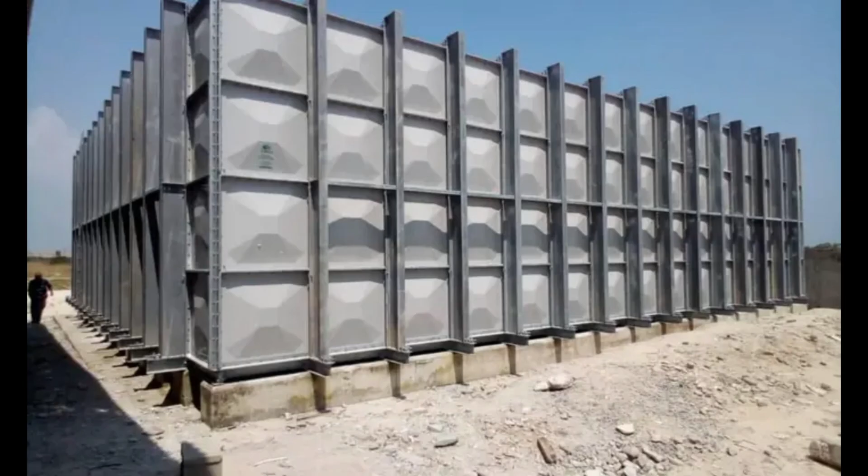Hello, hello, hello. We are designing a computer-controlled composite pressure vessel filament winding machine. And in this episode, we'll continue from where we stopped in the last video. The last video was an introduction of the entire scope of the project. But in this video, we are doing the proper design. Right now, we're talking about the kinematics. So, kinematic design.

If you have not seen the first video, it's instructive to go back and take a look at it, study, and take notes, because everything we did there applies here. In order to discuss the kinematics, I have to draw the frame, all right? So that's what I'm doing now.

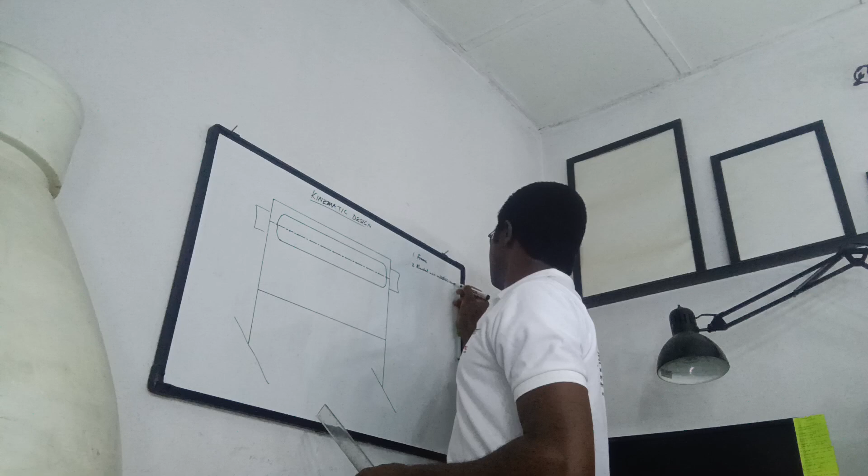Number two, a class of components that we're calling the mandrel axis rotation components. And as the name implies, they help hold and rotate the mandrel according to the computer program that we have written. So that's the first axis. The next axis we need to consider is the carriage, which is extremely important.

The carriage runs all along the length of the machine. It's longer than the machine actually because it needs to be able to move the payout eye device. And by the way, the payout eye device is like the end effector of a robot. A computer-controlled filament winding machine is actually a robot.

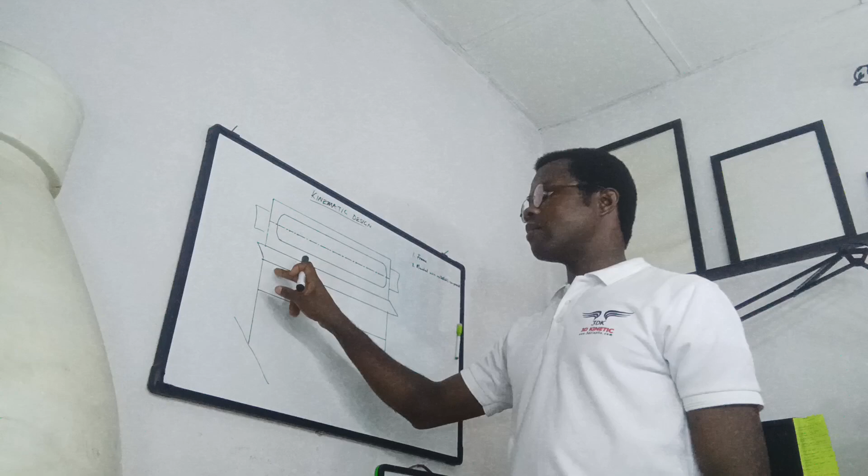So in this case, we're working with three axes, although we said that we might make a decision to add a fourth axis. So this is essentially a three or four axis robot. Okay, so this is robotics, in case you were wondering. So the carriage for the payout eye device carries not only the payout eye device, but also all the other components and even other axes that are required to move the payout eye device. So this is the carriage axis.

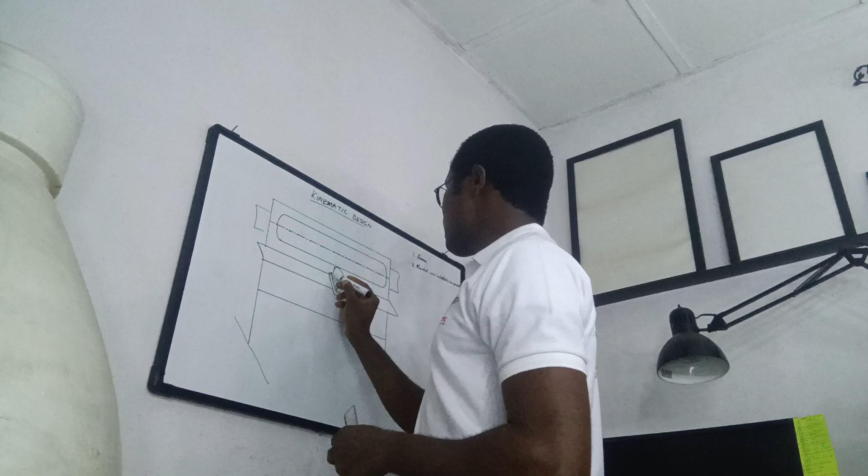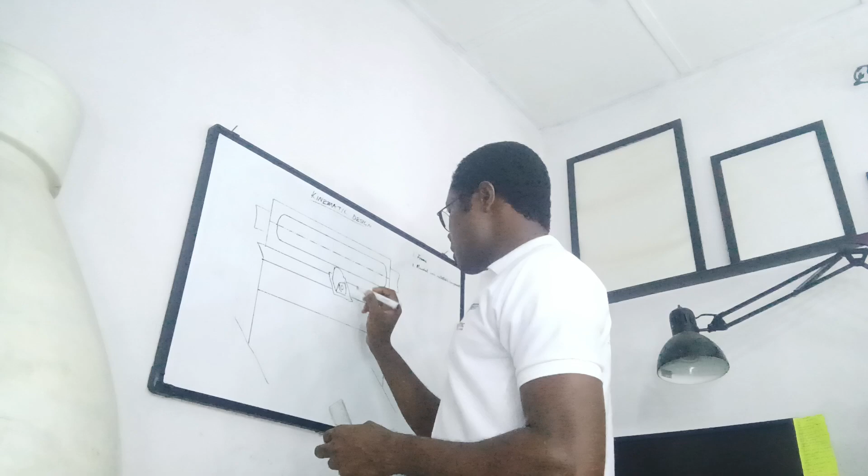On this carriage axis is mounted the payout eye device. The payout eye device winds wetted filament over the mandrel. It sits on a platform like that. And then the payout eye has a roll axis or tilt axis. This axis allows the payout eye device, which is a horizontally positioned roller at its tip, to tilt like this, okay, or roll. So this is the payout eye roll axis, right?

Payout eye roll axis. So since we're classifying components based on the axis, we'll call this the payout eye roll axis components, just like we did before for the other one. So the payout eye device has the ability to roll, and it has a range of motion of 90 degrees only. So this is a 90-degree range of motion.

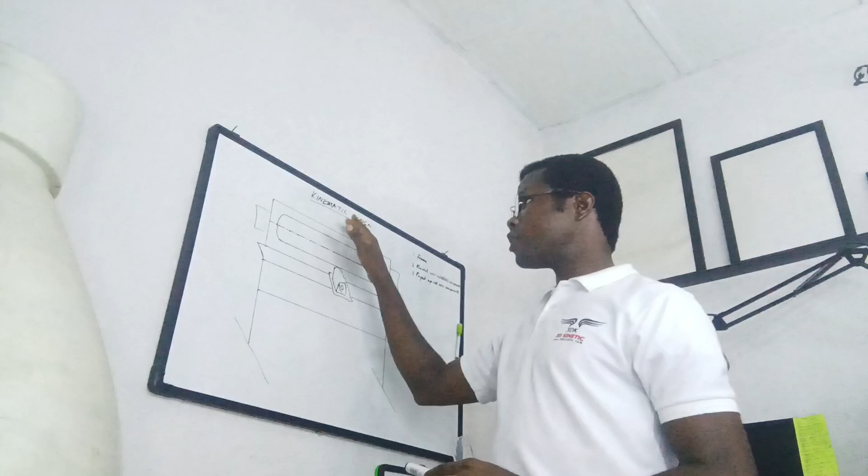And of course, we need to talk about the angles and distances because we're talking about the kinematic design, which is basically discussing how the machine will move, okay? The range of motion for the various axes. So for the mandrel rotation axis, this rotates 360 degrees many times, ongoing. So we'll program it to rotate as many times as are needed for the payout eye device to fully wind the entire surface of the mandrel, which we'll call one layer.

So when you finish winding the filament over the entire surface of the mandrel without any gaps, you have one layer, okay? And there are many different types of layers. So there are going to be the helical layers, there are going to be the hoop layers, and so on and so forth. But we'll talk about that in detail when we begin to discuss the actual programming and the winding pattern. There are many winding patterns depending on the application, but we'll talk about them and the factors that govern those winding patterns. So this is the payout eye roll axis.

Then we are considering adding another axis here, which is the payout eye yaw axis. So if you're familiar with aerodynamics, you may be familiar with the term yaw, I'm sure, or you may have come across it in some other discipline. So basically, while the payout eye roll axis involves the payout eye device moving like this, 90 degrees, okay? The payout eye yaw axis moves it in this way. So it rotates it around a vertical axis, okay? So the payout eye yaw axis is equivalent to moving like this. The payout eye roll axis is equivalent to moving like this. So I'm sure that's clear.

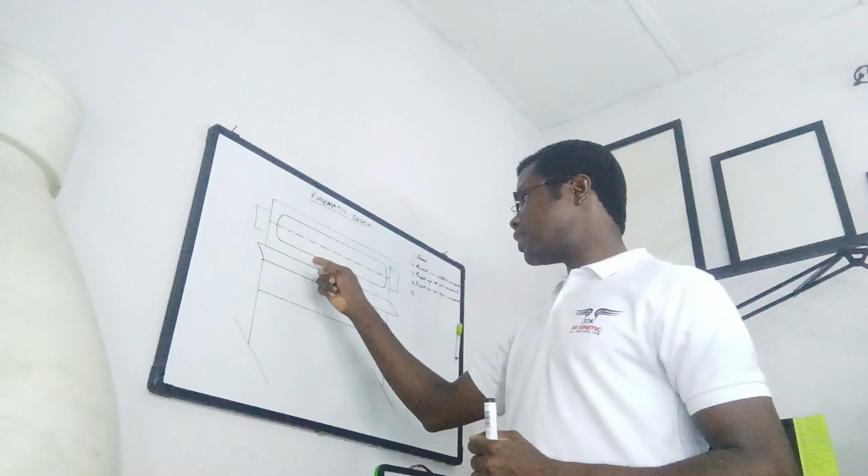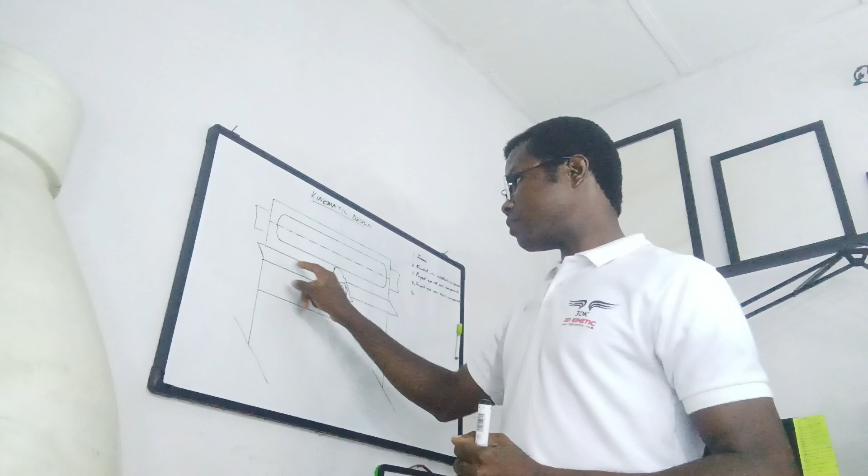And why do we even have these additional axes? We have these axes because of the complexity of the pressure vessel, particularly around the bottom and the top caps, which are shaped as domes. Okay. For the cylindrical segment of the mandrel, a simple motion along the carriage axis would be sufficient for the payout eye to simply wind a filament. If you're doing simple hoop winds, or when you're doing helical winds at a particular angle, you will run into difficulties if you only have that degree of freedom riding on this axis and then the mandrel rotating.

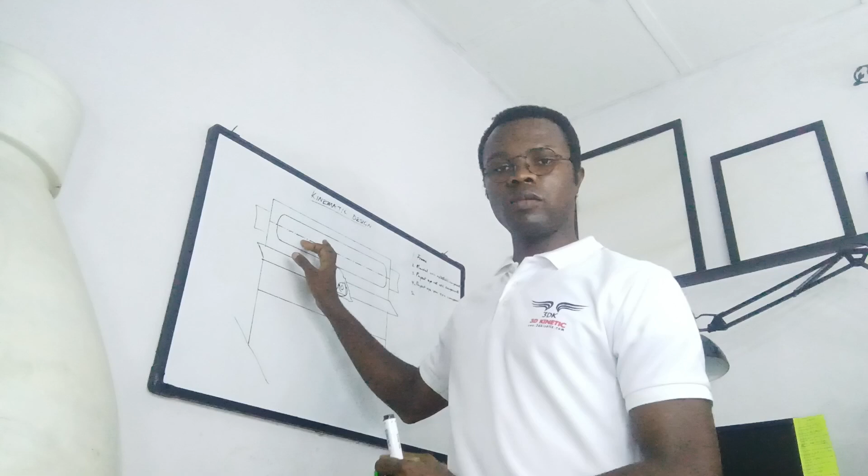You need the payout eye device to be able to position and face the mandrel more directly. You want the payout eye device to dispense filaments at 90 degrees. You want the filaments to be coming out at 90 degrees. You don't want it coming out at awkward angles, which will cause it to have inconsistent patterns. It will not lie in the same way. You may have variation of the width and so on and so forth. So these are the reasons why we have multiple axes.

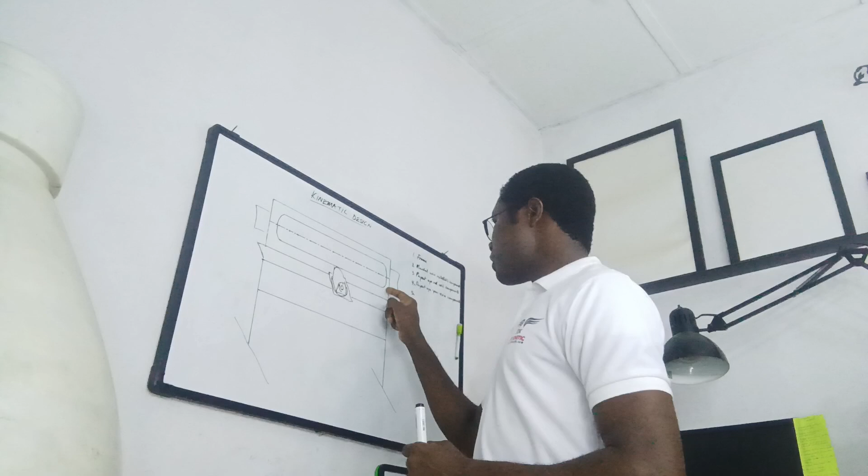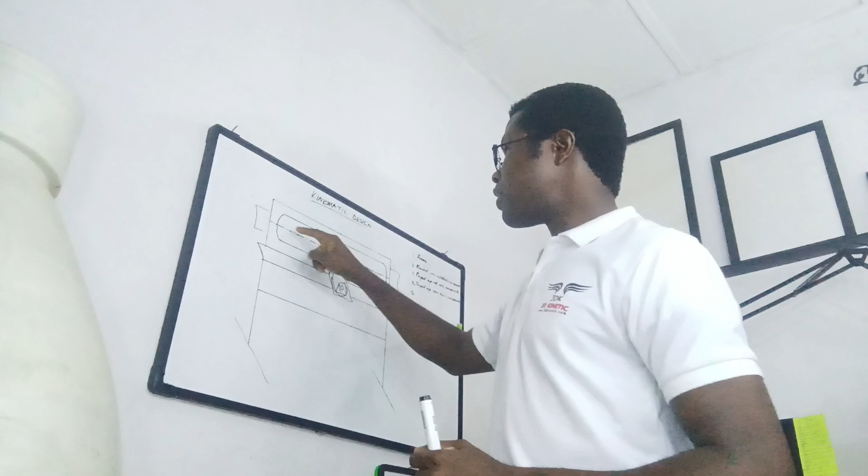It's also very important because when you're winding the material, when you're feeding the material, it allows you to more carefully and more consistently position the filament, because sometimes when you're winding around the ends, around the domes, complicated shapes like that, if you don't have a program that accommodates the shape properly, you can have fibers slipping away from the initial position later. So for example, you can have this move over there, and then the fibers can lay down in the correct position. But as the machine moves back to continue the cycle, that fiber can leave that position.

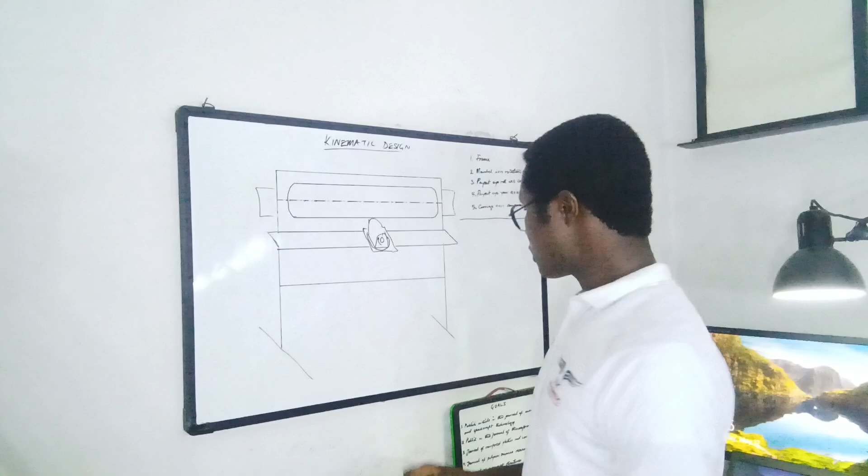And when you have a gap there, a gap is a weakness in the component. So when you perform one complete layer, the expectation is that every square millimeter of the surface of that mandrel has been covered with the filament. Any gaps are weaknesses. So if the cylinder were to be inflated or put under pressure, that would be a likely failure point. We will now go ahead and discuss the carriage axis components in greater detail. So

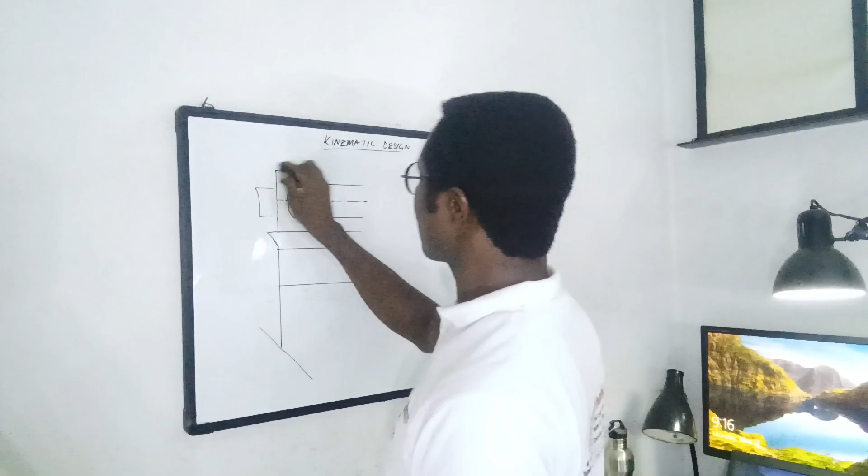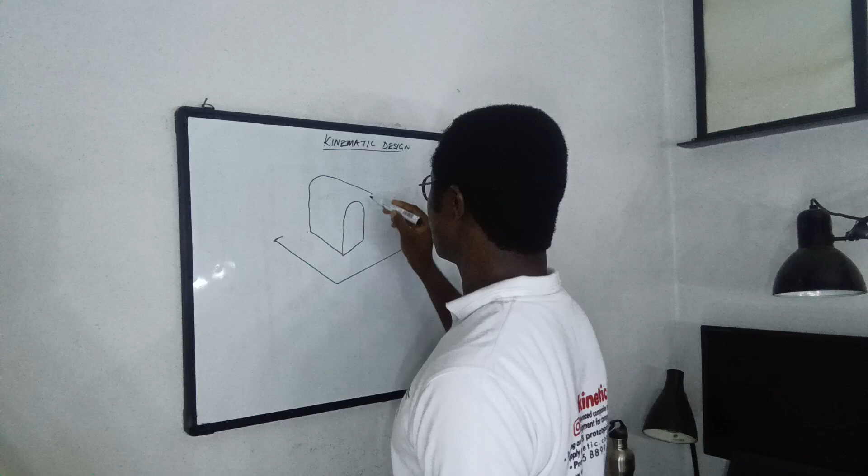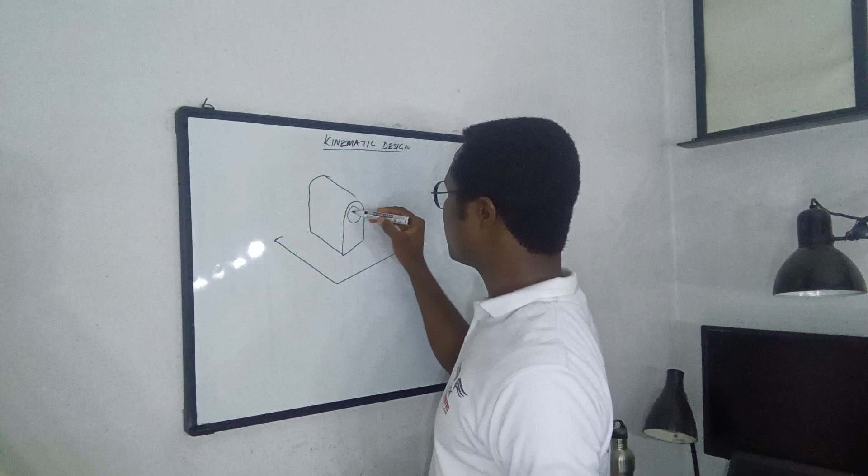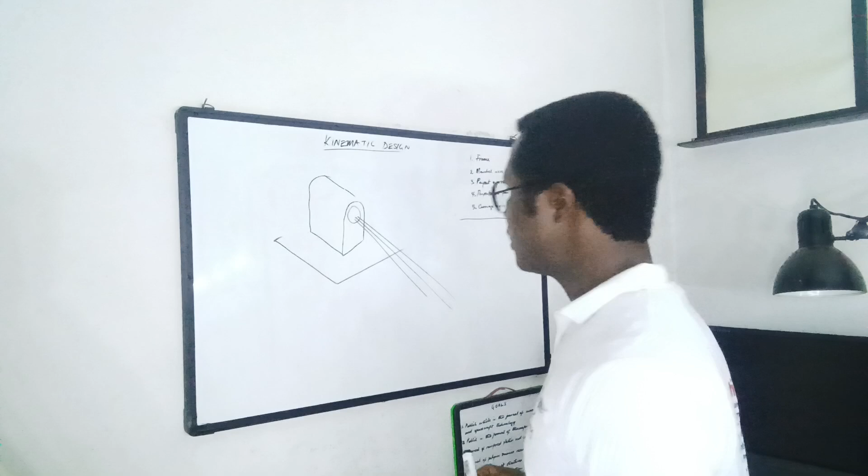As initially sketched before, there's a platform that the carriage axis sits on. The carriage axis supports the payout eye device. The payout eye device has a tube through which the fibers are fed. So let these lines represent the filament being fed into the payout eye roller.

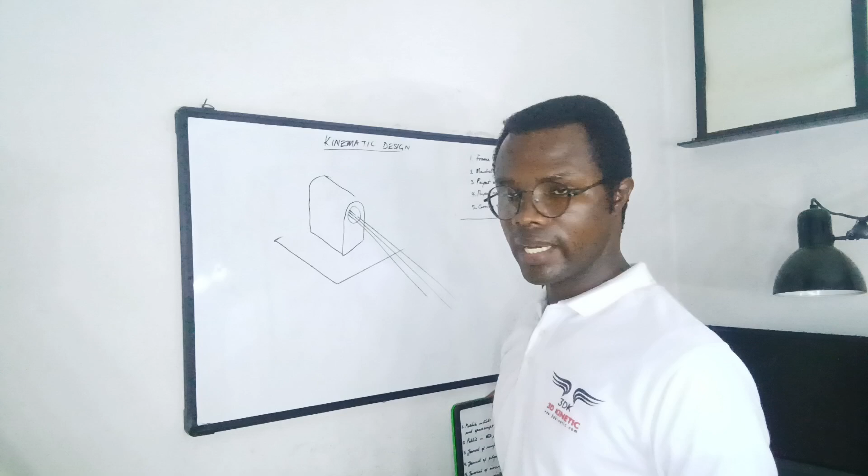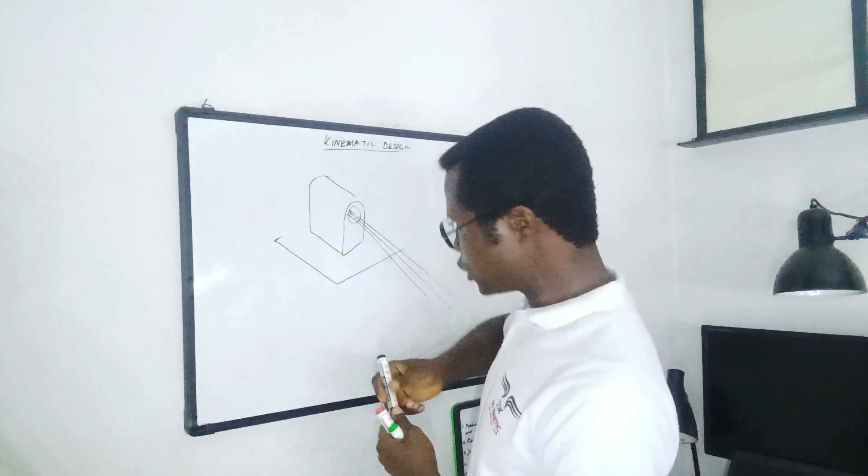These filaments are going to be on bobbins that are mounted on a frame. So they're fed from bobbins mounted on a frame. They're passed through a tensioner. They go through rollers and are immersed in activated epoxy resin or polyester resin, depending on what the winding is being done with. And then they move into the payout eye device, going through this opening to a roller, which is called the payout eye.

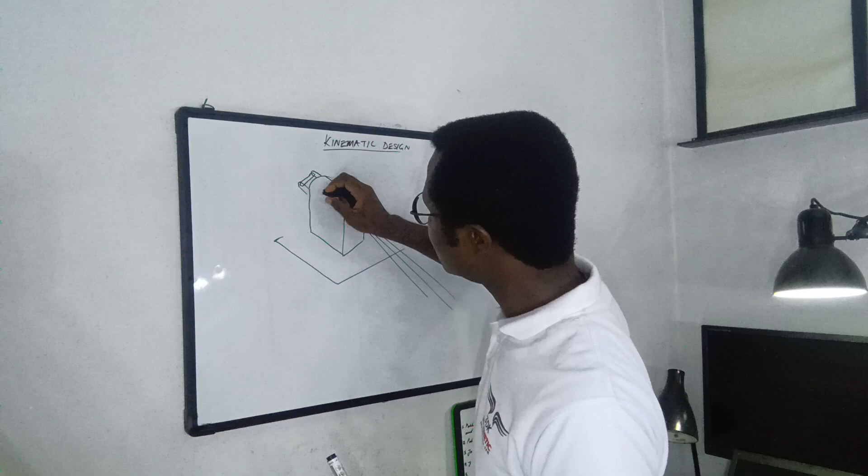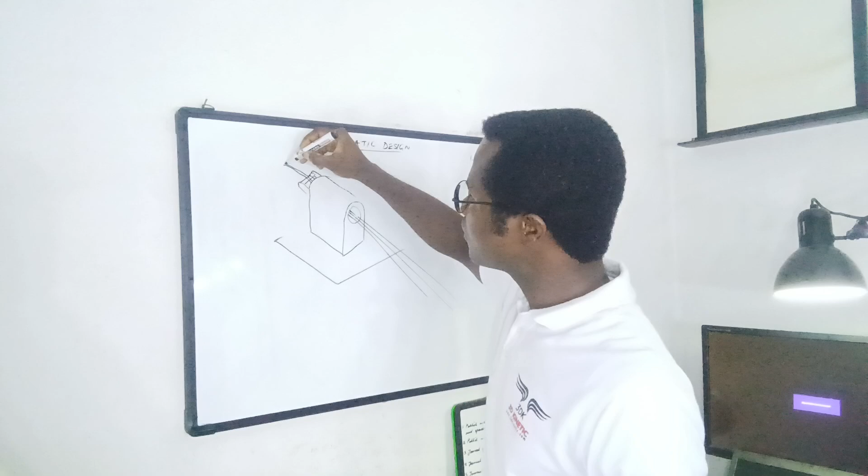This is what the payout eye roller looks like. And I'll discuss the roller more specifically. It has a special profile that allows it to perform the task it's designed to perform. Okay, that's what it looks like. The fibers wind over the roller and they are fed to the mandrel. They wind around the mandrel.

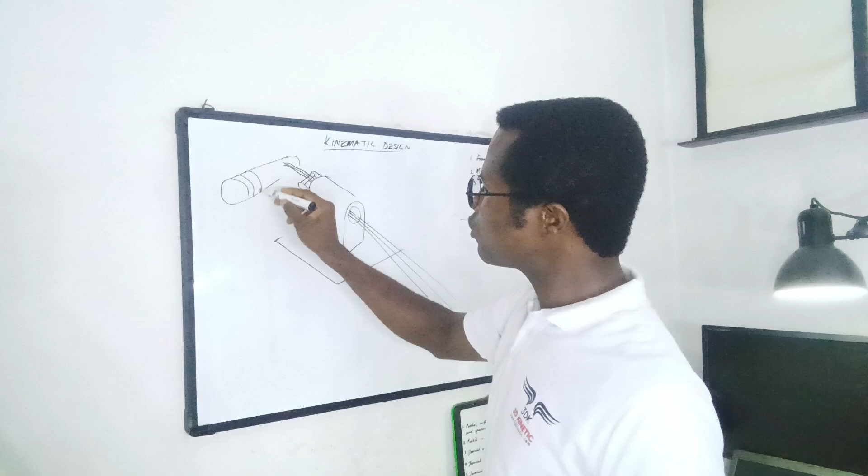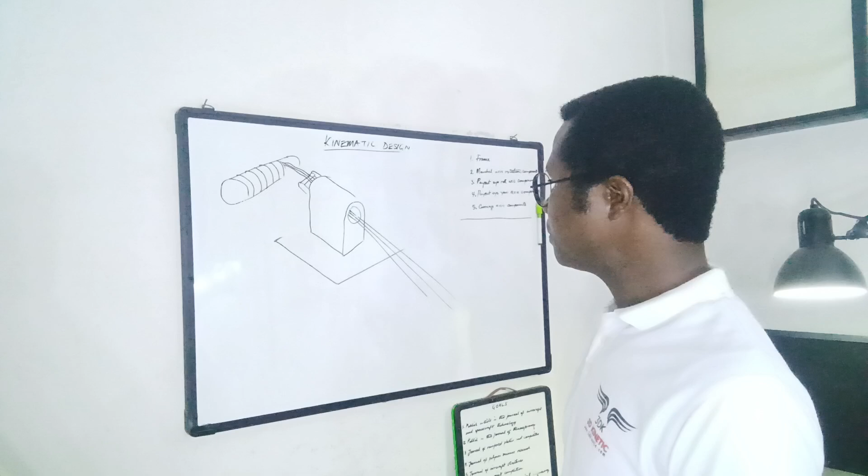So let's draw a small cylinder here to represent the mandrel. And let's draw lines on the mandrel to represent fibers being wound over the mandrel, and so on. So this is a simplified look of what the carriage axis looks like. So the carriage axis supports all of these.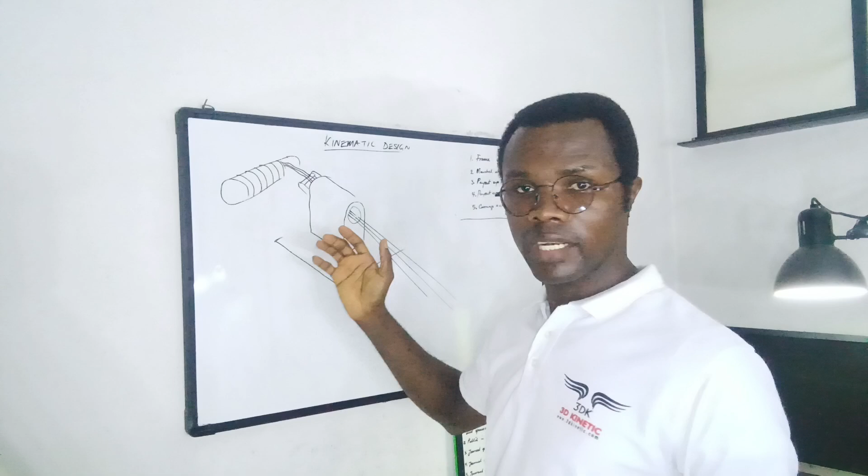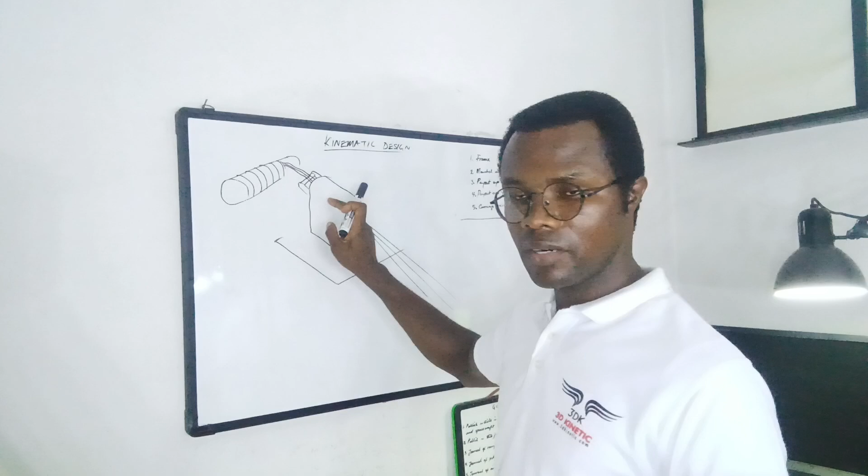This cylinder within here is mounted on bearings on both ends, and there is a half gear, okay? Because it has a degree of motion of 90 degrees, although the half gear allows you to have 180 degrees motion. So we have an allowance to be able to change our minds during the programming part. But at a minimum, we have at least 90 degrees here. But in actual fact, we have up to 180 degrees.

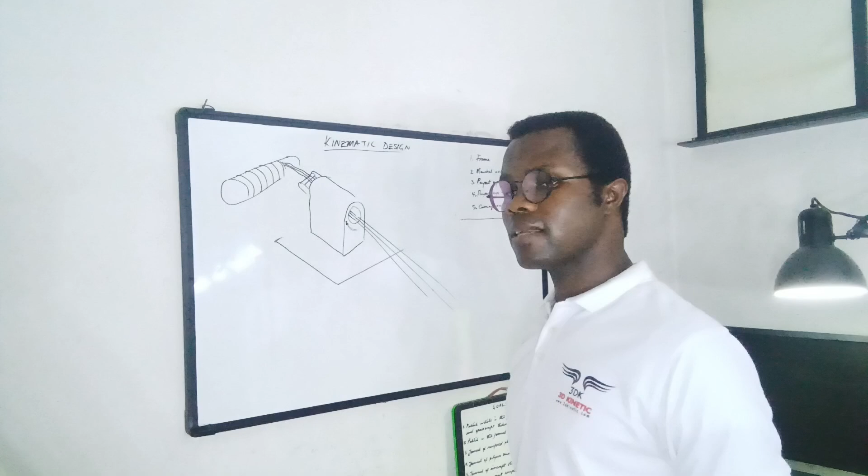So this cylinder you see here has the ability to roll. So this is the mandrel payout. This is the payout eye roll axis. It gives it that degree of freedom to move 90 degrees. And as I said, that's done with a half spur gear, half of a spur gear. Now, what I mean by half of a spur gear is, you know what a gear is, right? It's got teeth all around it.

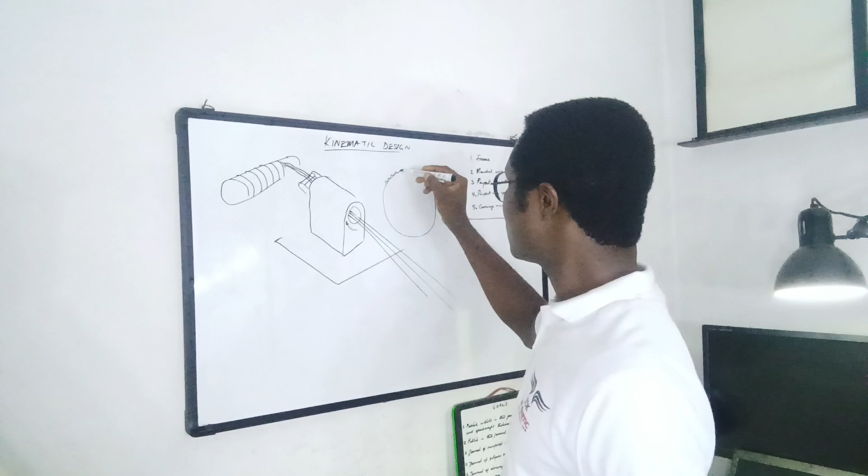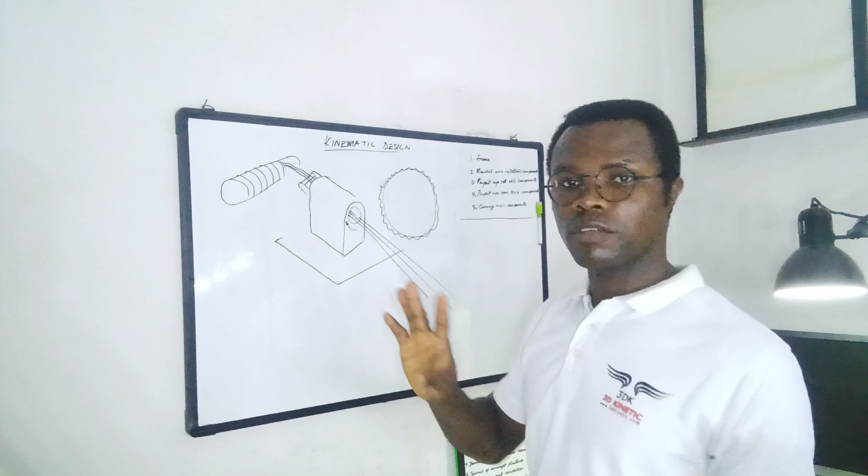But in this case, in our application, we're not going to rotate the device 360 degrees, which is a complete rotation. It's occasionally going to move 45 degrees in one direction, 45 degrees in the other direction. So actually, we don't need the other half of the gear. Okay, we don't need this other half of the gear. This is the center.

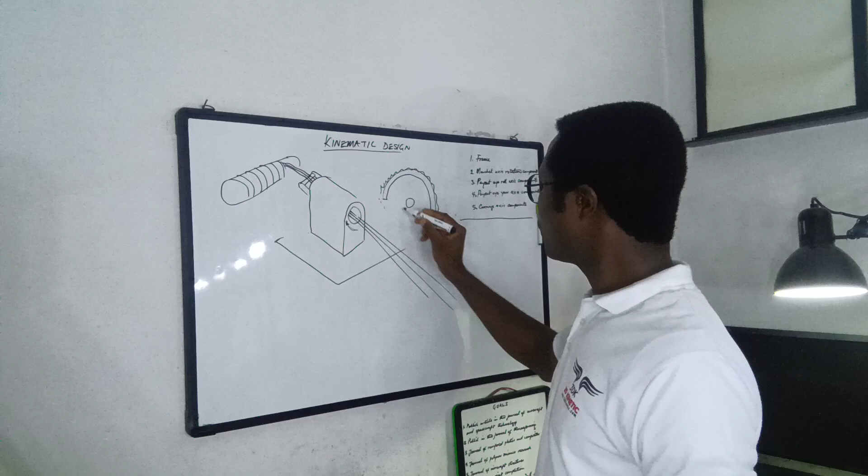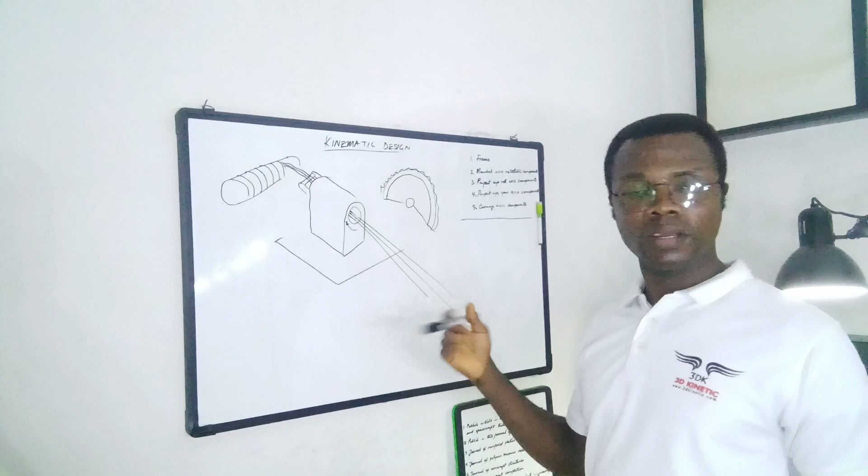So we just need a part of that gear to minimize material use. The rest of the gear will never actually be used. So there's no point using the full gear.

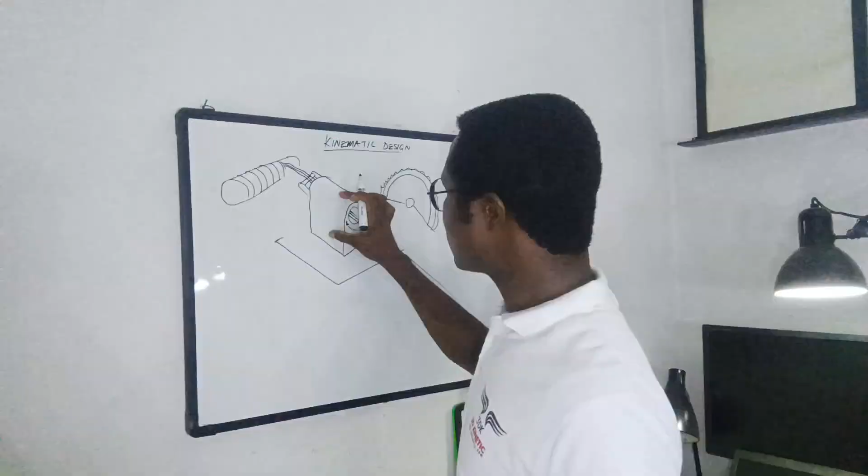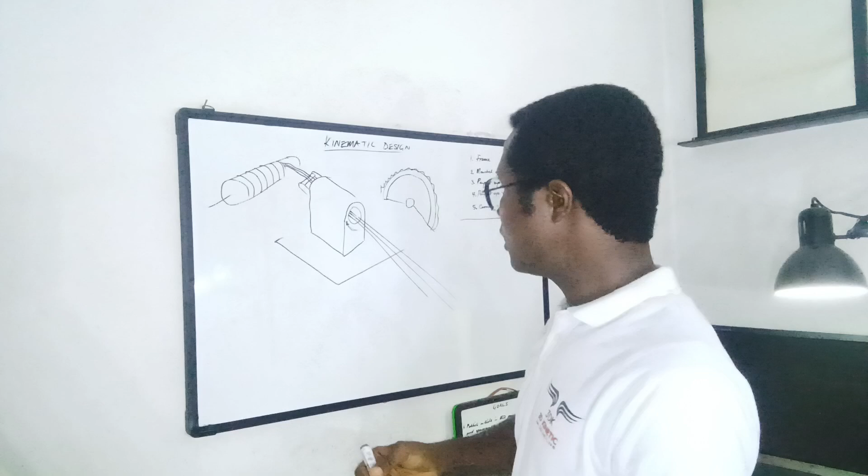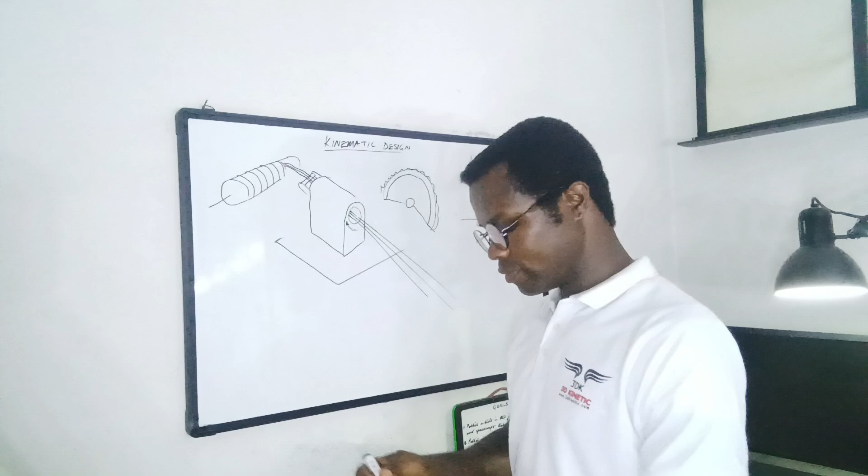Okay, then the payout eye device, as I described, has a cylinder through which the wetted fibers are fed over rollers onto the mandrel. But in order to implement the yaw axis that we just described, the payout eye yaw axis, which allows the payout eye device to move in this way: the roll axis moves the roller in that way, and the yaw axis moves it in this way.

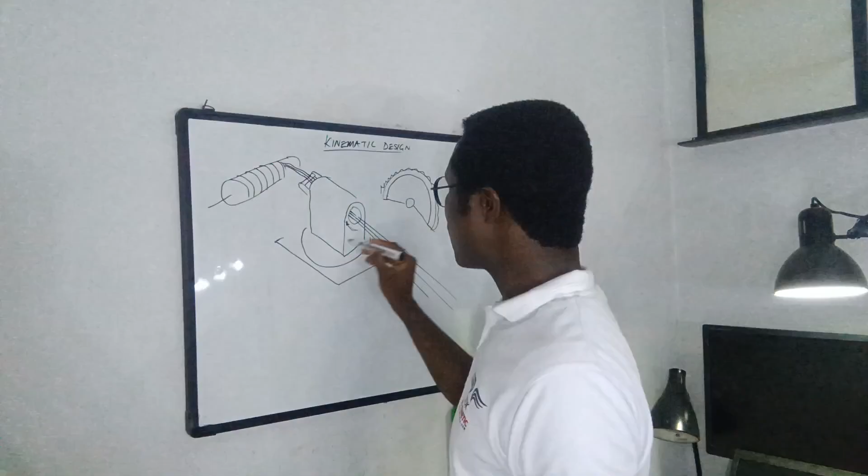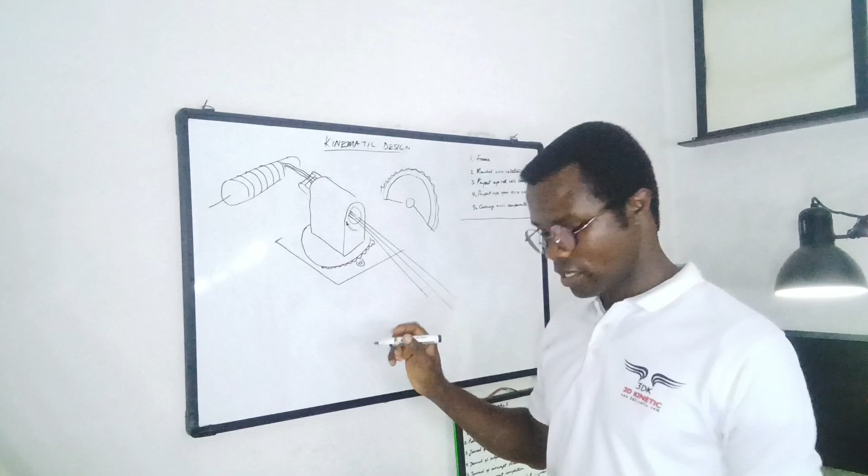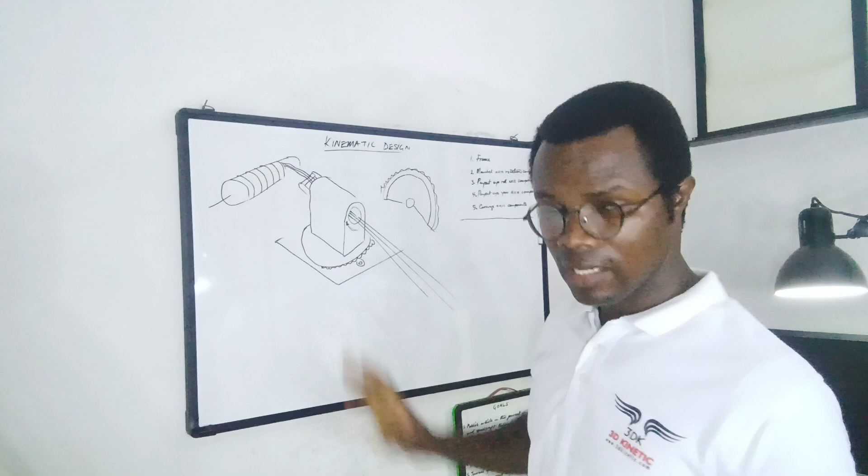In order to implement that, this whole platform needs to sit on a pivot, and similarly, it will be driven by a half spur gear. So let us imagine these are the teeth, not a complete spur gear. We have a small pinion here, and we're going to calculate the transmission ratios, the loads and torques. But because we're talking about kinematics right now, we're not talking about force analysis or load analysis. We're talking about range of motion, angles, distances. That's what fits within the scope of kinematic design.

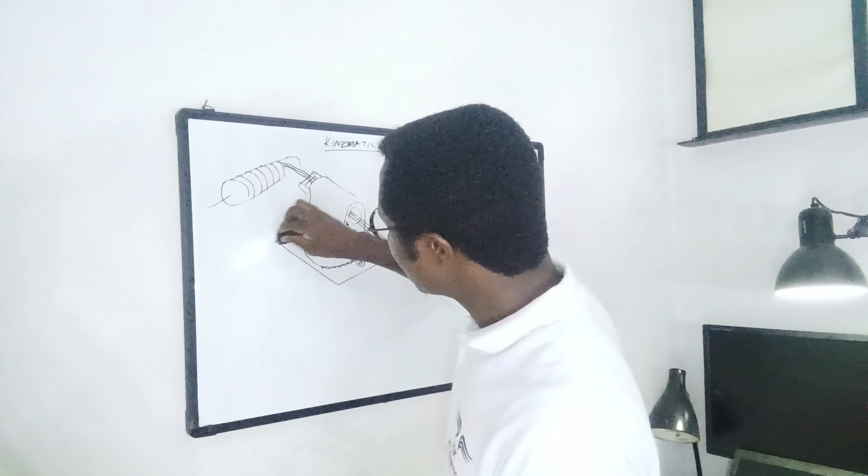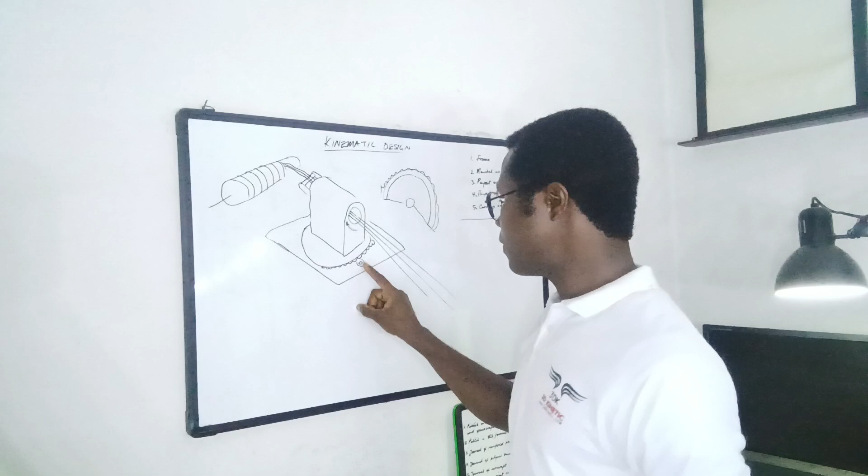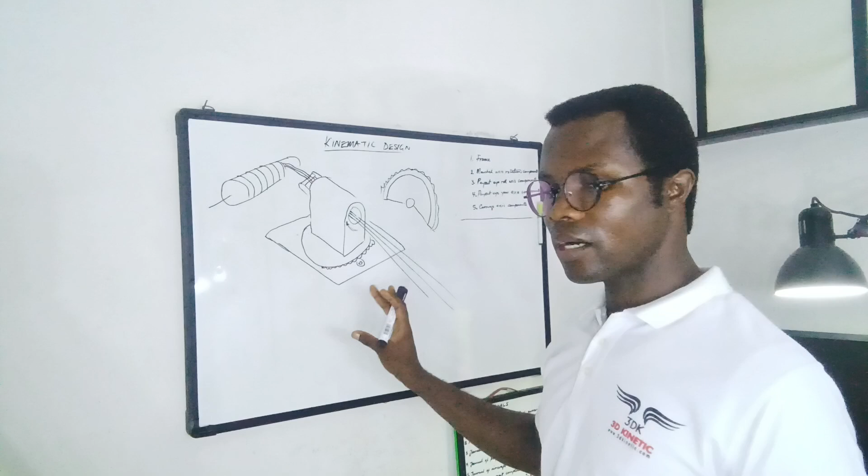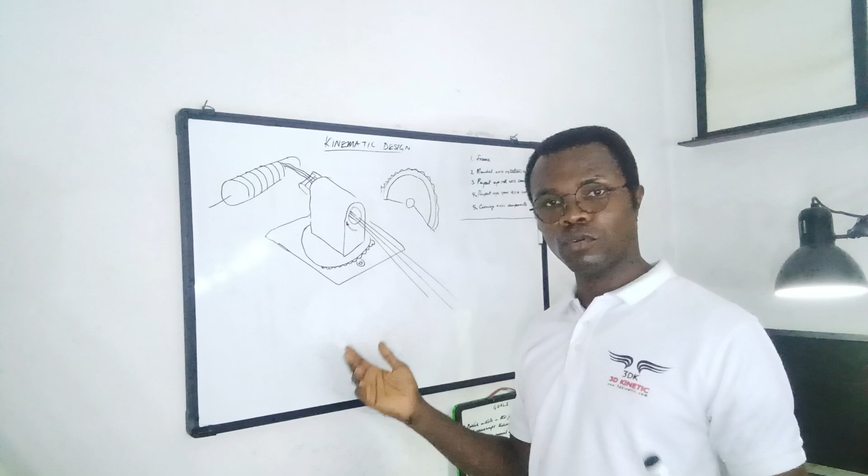So the whole payout eye device sits on a pivot. The pivot is driven by half of a spur gear or a fraction of a spur gear. It can be 25% of a spur gear, 40%. When we get to the actual design, I will calculate the exact number. I'm not going to make a large gear for no point. And with the fabrication technique we're using to make the gear, it really doesn't have to be a full gear for us to make it accurately. We'll talk about that when we get there.

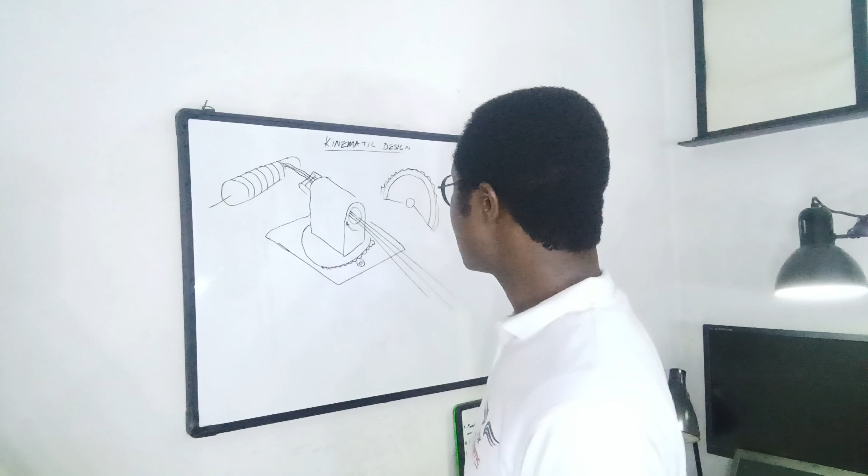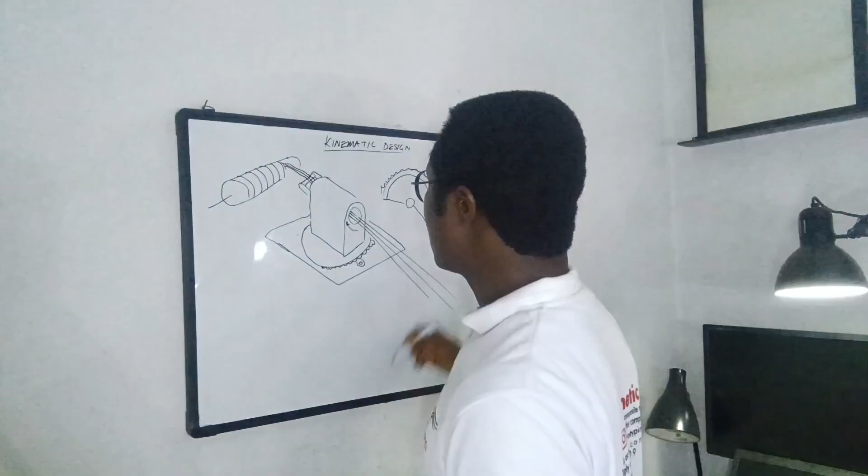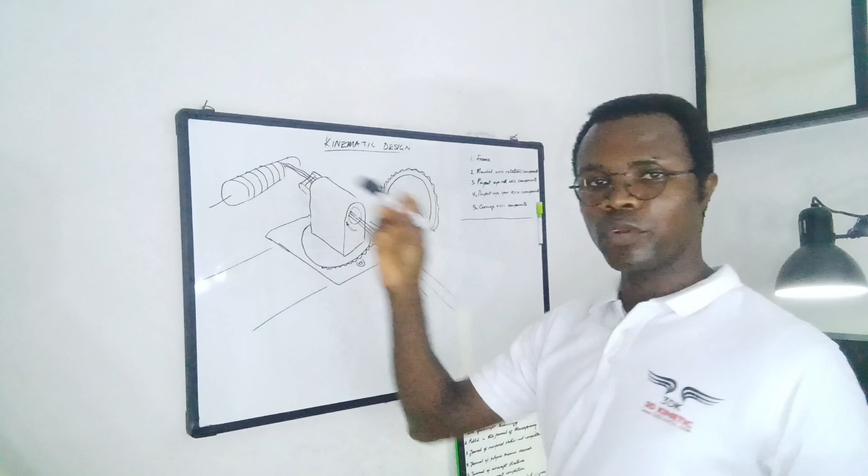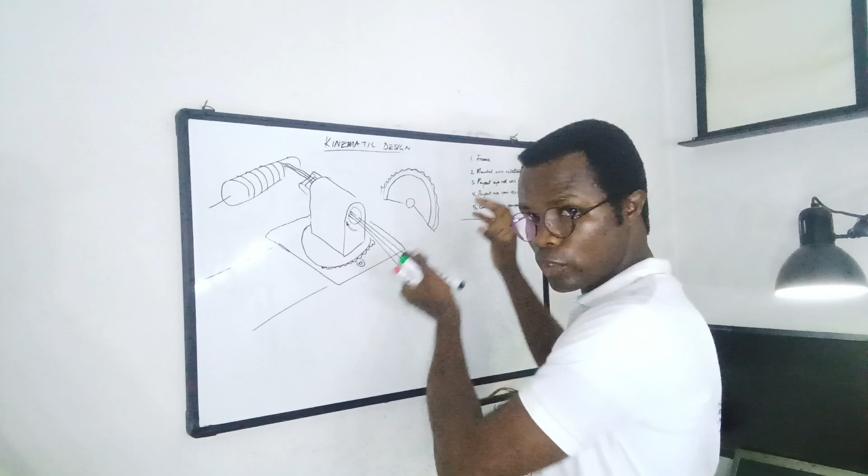We'll discuss in detail. So this is a fraction of a spur gear, could be half, could be less than that. But in essence, all we need to do is move this 90 degrees, 45 degrees to the left, 45 degrees to the right. And then the entire assembly rides on two rails, called the guide rails, which run through the length of the machine, as I described in the first sketch. So this whole assembly moves all the way to both ends, a total range of motion of 2 meters for the carriage axis. So this brief discussion has covered the carriage axis.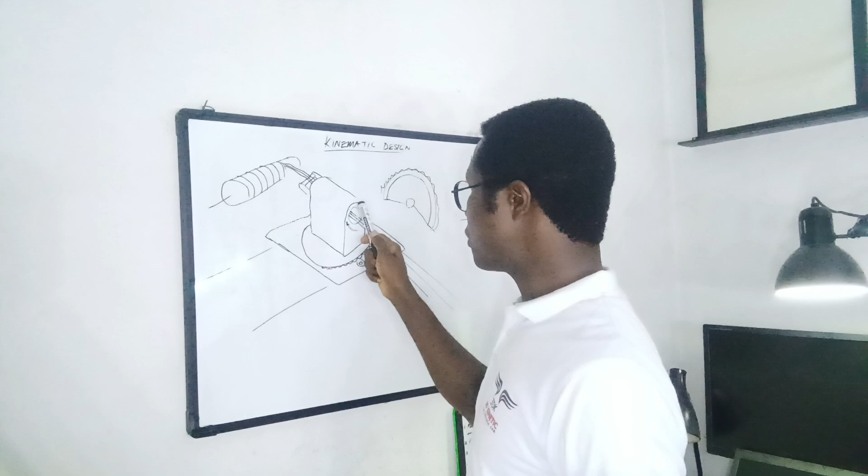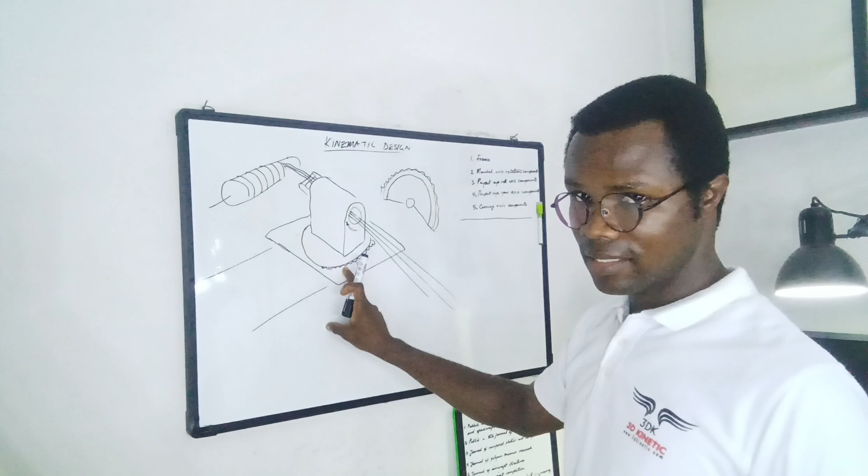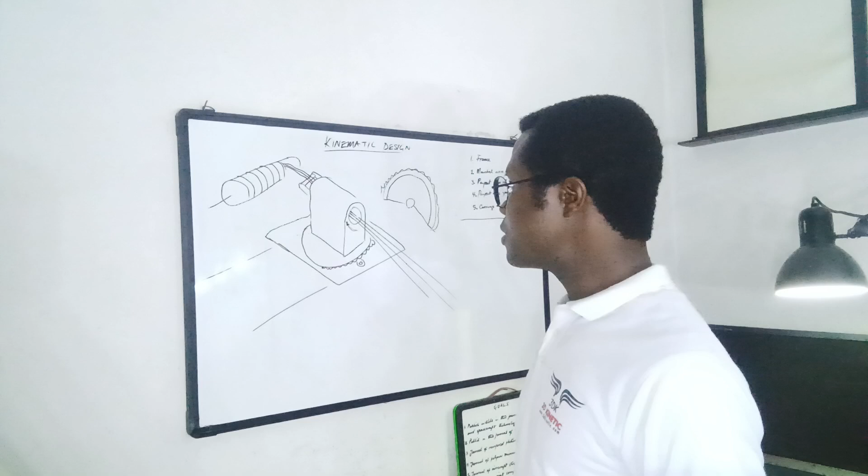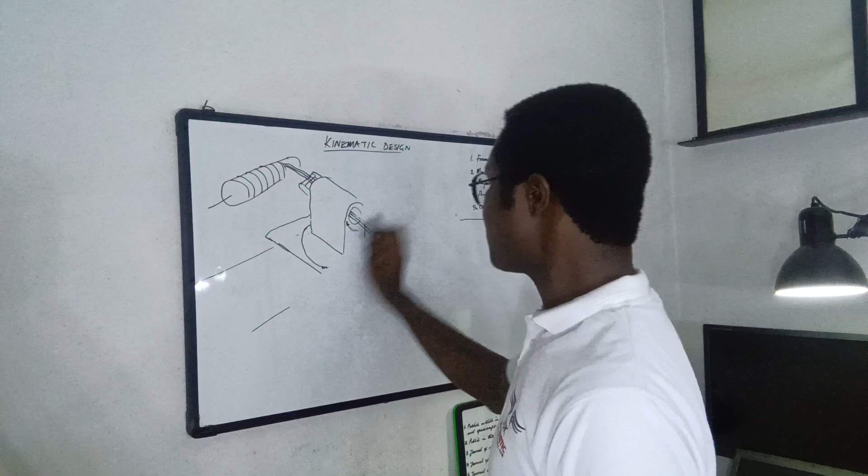We'll do detailed design of all the components for the payout eye roll axis, as well as the payout eye yaw axis. In order to effect motion in each of these axes, you need a transmission, and there's going to be a design for each of those transmissions, estimating the loads, estimating the power requirement for the motors, and calculating the transmission ratios. So that brings us to the end of this aspect of the kinematic design. The only other thing I've not discussed, and I'm going to discuss briefly, is the mandrel rotation axis.

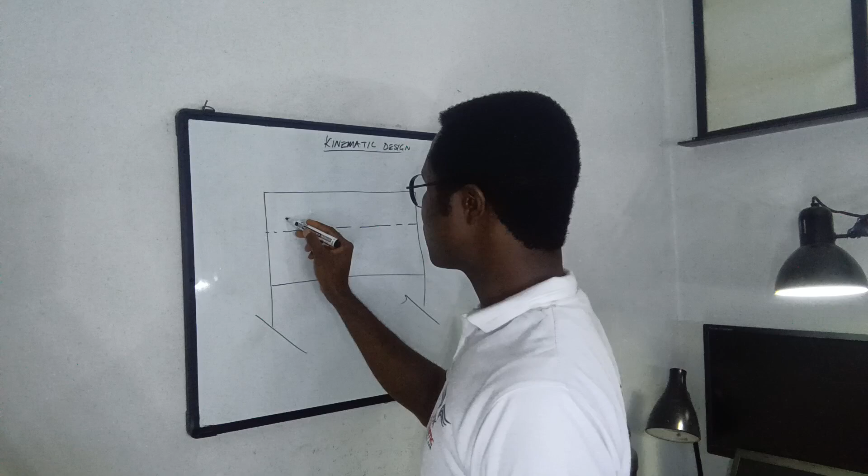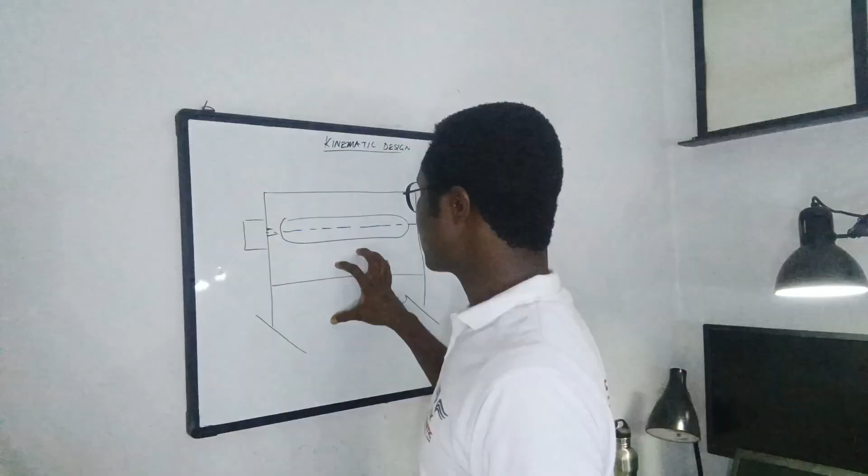So similar to the first sketch, we have the frame standing on the ground. We've got the mandrel rotation axis. We've got the mandrel. Then we need a mechanism for mounting the mandrel to the machine. You have to be able to lift the mandrel, place it on the machine, and tighten it properly before running it. Those are components that will be discussed. All that the mandrel rotation axis does is hold the mandrel in position and rotate it along its central axis in a controlled way, according to a computer program. We'll write a program to do all of this.

So what's involved here really is a transmission and a motor mounted on either of these ends. My preference is this end. That transmission will drive this, and all of that motion will be coordinated. It will all be happening at the same time because the program will simultaneously control all axes, whether it's 3 axes or 4 axes. If we have enough time, we'll make it 4.

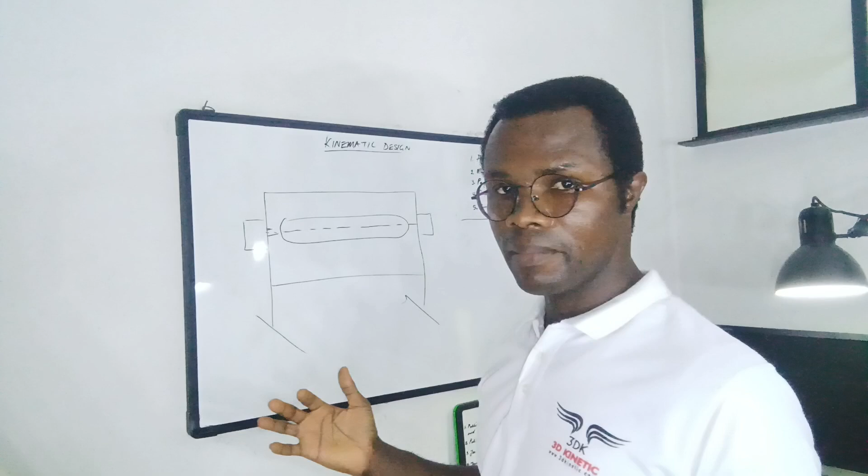So that brings us to the end of the kinematic design. The conclusion is we now know the range of motion for all of the axes, which is the starting point for mechanical design, the starting point for load analysis and other aspects of our design. So now we can go to the load analysis aspect and begin to discuss what all of those decisions imply.